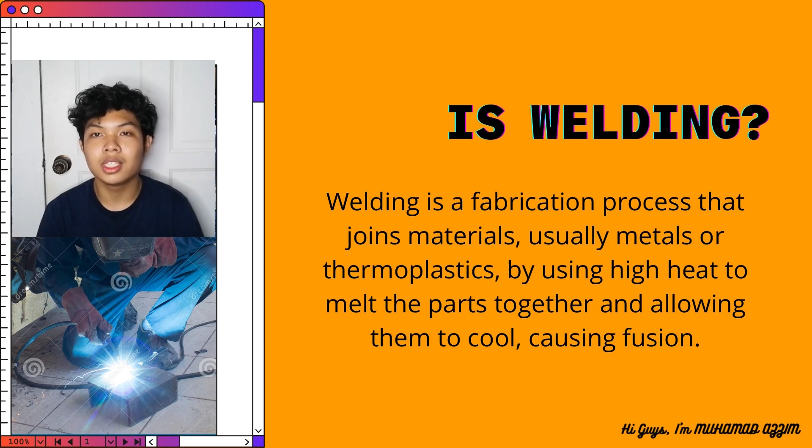Automotive applications of welding. A wide variety of automobile body components are joined together using welding techniques. The necessity for development of new welding techniques for automotive applications is ever growing to meet the new material combinations for auto body parts. The requirement for innovative welding processes is felt strongly in recent days, with automotive manufacturers focusing on lighter yet strong and fuel efficient vehicles employing lightweight alternative materials.

Autobody technicians use a variety of automotive welding techniques to complete structural repairs on various vehicles and equipment. The most commonly used welding methods for automotive applications are resistance spot welding, resistance seam welding, metal inert gas welding, tungsten inert gas welding, as well as laser beam welding, friction welding, and plasma arc welding.

Examples of automotive welding. There are many ways to use welding on cars to repair collision damage or damage due to age of the car. Here are some welding applications for vehicles. The first one is vehicle frame or fender welding. Vehicle frames and fenders become bent or damaged in collisions.

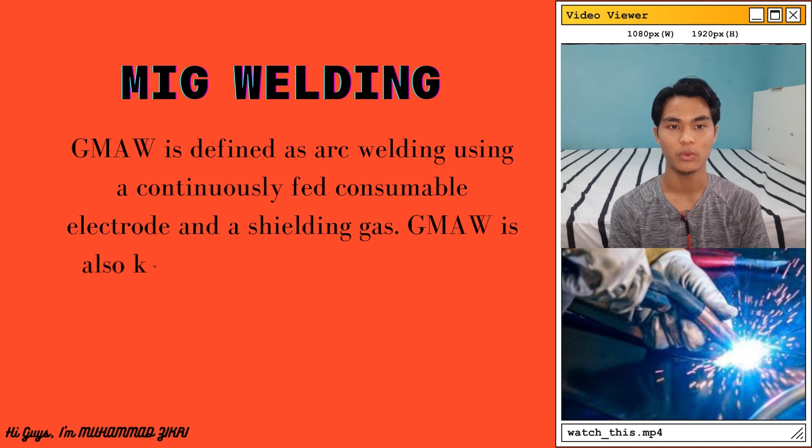09DKM20F2004. The topic that I would like to share with all of you is the type of welding used in cars. Carbon steel welding is mostly done through MIG welding. GMAW is defined as arc welding using a continuously fed consumable electrode and a shielding gas. GMAW is also known as MIG, which is metal inert gas. It produces high quality welds. It also yields high productivity.

MIG welding was originally invented in the 19th century when Humphry Davy discovered the electric arc. Originally, carbon electrodes were used but later substituted by metal ones. The first innovation came in 1920 when a bare electrode wire and direct current were used with an arc voltage to regulate the feed rate.

Today, MIG welding is seen as one of the most popular welding processes, especially in the sheet metal industry. Consequently, it is an important factor for the automotive industry as well. A lot of people are still fixing automobile parts on their own in their garage with MIG welders. The greatest advantage of MIG welding in the automobile industry is that it is capable of producing clean welds. Not only that, but it's great for precise work. There is minimal spatter and you can work with dissimilar metals easily.

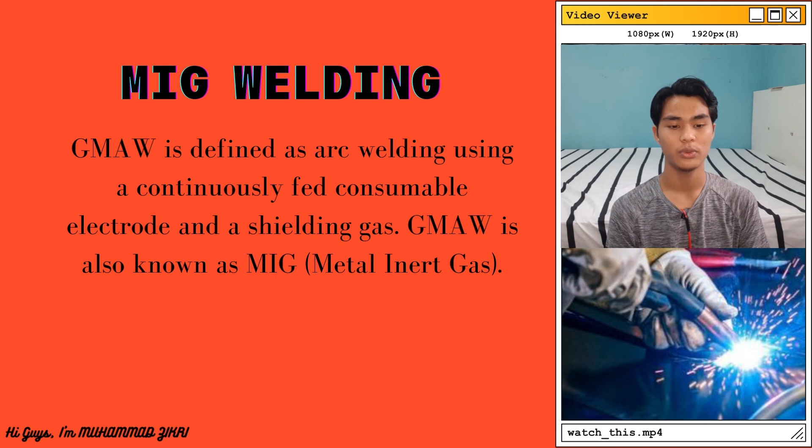It can handle a wider range of thickness than TIG or stick. MIG can handle the materials used in auto bodies without sacrificing strength or clean appearance. The newer MIG welding machines also have tons of options that make it easy to avoid distortions. It is also one of the easier processes to learn. For seasoned veterans and new welders alike, it's the best choice for auto repairs. MIG welders are by far the go-to welders for beginners because of the

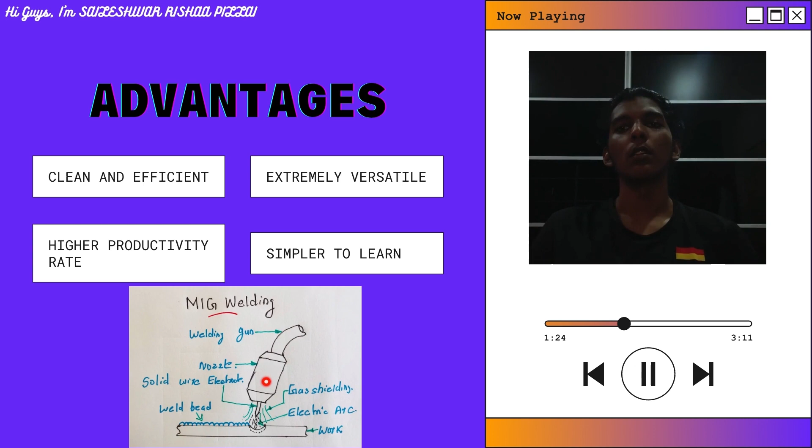Secondly, MIG welding is the simplest to learn. Welders can learn or educate others how to MIG weld in a few hours, and some instructors claim they can provide basic training in 20 minutes, with the majority of time being spent on cleaning the weld. In comparison, TIG welding takes a long time to learn, and most welders working on home projects wouldn't want to invest time into it. One of the instructors described MIG welding as a point and shoot process.

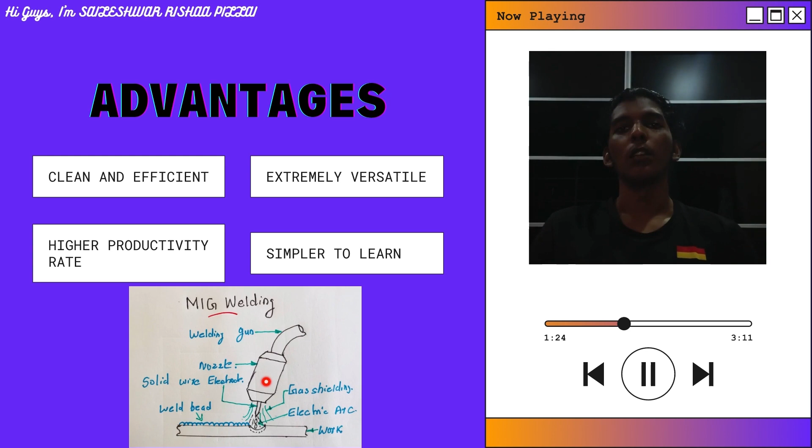Thirdly, MIG welding is clean and efficient. Since MIG uses a shielding gas to protect the arc, there is very little loss of alloying elements as the metal transfers across the arc. There is no slag to remove, which is typical for stick welding, and only minor weld spatter is produced. After a brief cleanup, MIG welders will be back on the job in a fraction of the time thanks to the minimal cleanup it requires.

Furthermore, MIG welding is extremely versatile and can weld a wide variety of metals and alloys, while operating in a variety of ways such as semi and fully automatic. While MIG welding is useful for many home welding projects, it is also used in a large number of industries. MIG is used for metals such as aluminium, copper, stainless steel, mild steel, magnesium, nickel and many other alloys, as well as iron and most of its alloys.

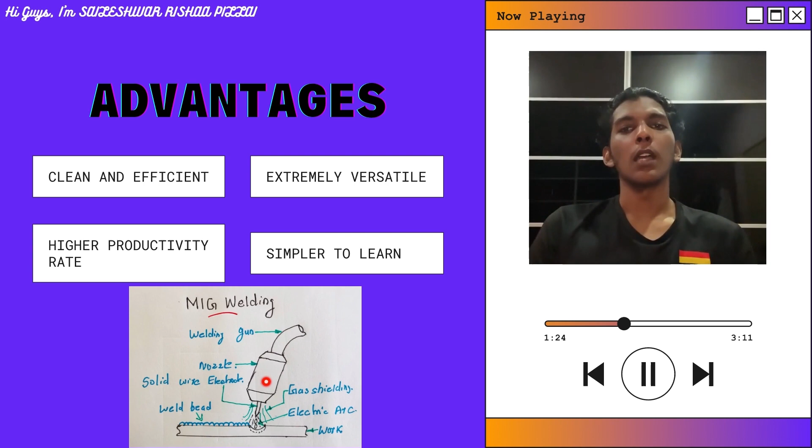And of course, every product does have its disadvantages. The first disadvantage is the cost itself. Welders will notice right away that MIG welding equipment is more complex and costly, while also sacrificing portability. In addition, shielding gas, electrodes, and replacement tips and nozzles for MIG welding can add up.

Next, MIG welding has limited positions. The fluidity of the welding puddle and the high heat input of a MIG welder rules out vertical or overhead welding, while some welders would never even think of welding in one of these positions. Take this fact into consideration when deciding whether or not to purchase a MIG welder, to make sure it can accomplish all jobs planned for it.

Moreover, this welding isn't suitable for outdoor welding. Besides not being portable, MIG welders are also unsuitable for working outside since they use shielding gas to protect the purity of the weld. Wind will play havoc with the shielding gas and impact the quality of the weld. A MIG welder also can't be hauled out into a field to repair a tractor, but works great in a garage for automotive work.

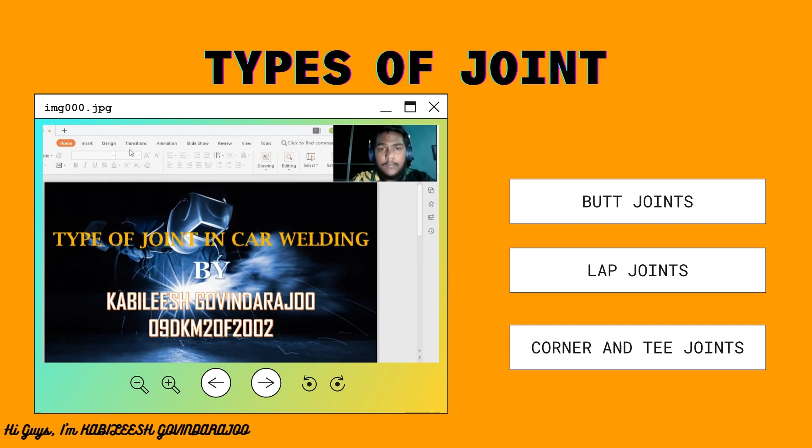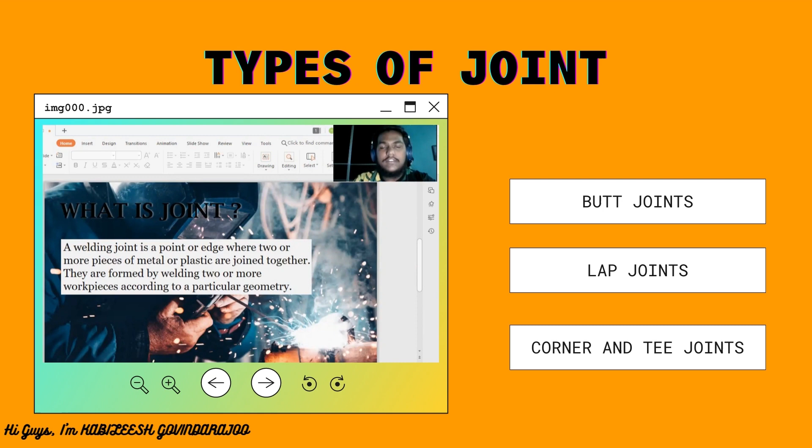Today, I'm going to talk about types of joint in car welding. First of all, what is a joint? A welding joint is a point or edge where two or more pieces of metal or plastic are joined together. They are formed by welding two or more pieces according to a particular geometry. There are many types of joints, for example, butt joint, T-joint, corner joint, edge joint, and lap joint.

Now I'm going to talk about welding joints in a car. There are kinds of welding joints that are commonly used in car welding work. Each joint piece can serve a number of different purposes based on their shape and where on a car they are to be placed. The three types of weld joints are listed as follows. First one is butt joint. A butt joint is a type of joint between two edges of different metal pieces that are lying in the same direction. The joint of this type may be either square or groove.

Second one is corner and T-joint. The corner joint is a joint between two edges of metal pieces that meet at a perpendicular 90-degree angle. A T-joint is a joint between two pieces of metal where one piece's edge is perpendicular to the surface of the other. The corner joint forms an L shape and the T-joint has the shape of the letter T. Both joints are commonly used in many types of metal structures, especially in car welding.

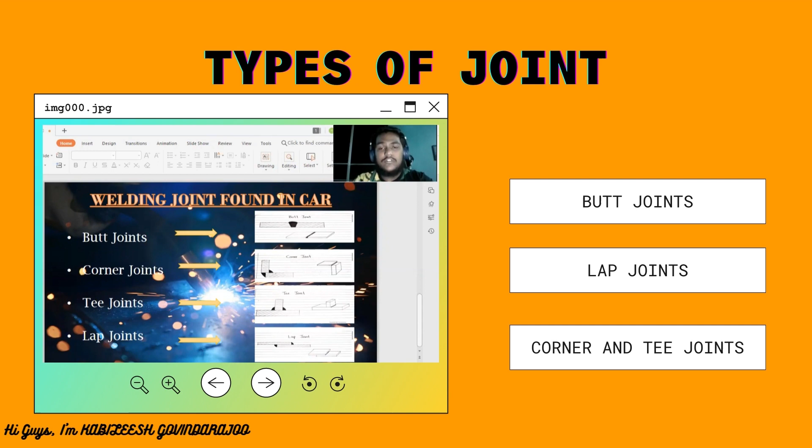The final one is lap joint. A lap joint is a joint between two pieces that are overlapping one another. It is one of the strongest types of joints available. However, for maximum joint efficiency, the overlap should be a minimum of 3 times the thickness of the thinnest member of the joint. Lap joint is used with torch brazing and spot welding applications.

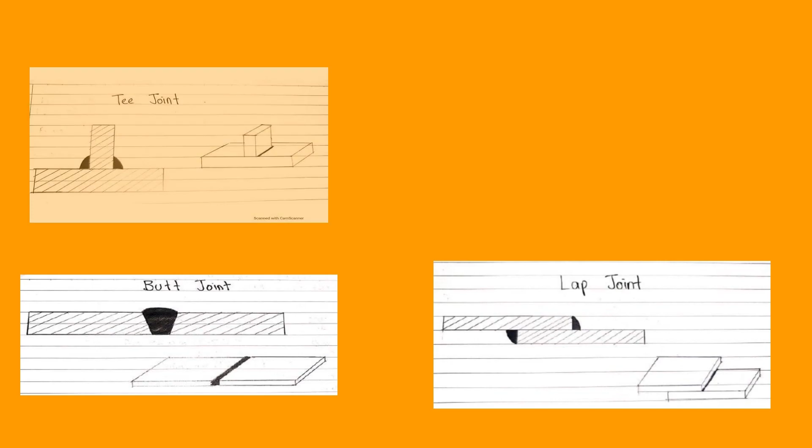I'm going to talk about the safety elements during welding a car. Welding is a dangerous job that can do heavy damage to our life. That's why welding is a high-salary job. Tools are most important in welding. The welder should use the correct equipment to make sure the product is good and to ensure their safety.

First of all, welding helmet with side shield. A welding helmet will protect welders from UV radiation from the oxyacetylene flame. Rather than welding helmets, welders can use welding goggles to protect their eyes from the UV radiation too. Welders also must use a welding apron. It can protect them from hot slag.

Welding is a very hot process of work. A lot of heat is needed and the place can easily catch on fire. So the welders should use gloves, fireproof clothing and boots to ensure their skin is protected from burns and to be able to rescue them easily if any accident occurs. Welders are advised to use respirators during the welding process because fumes and oxides are produced and they can damage their health.

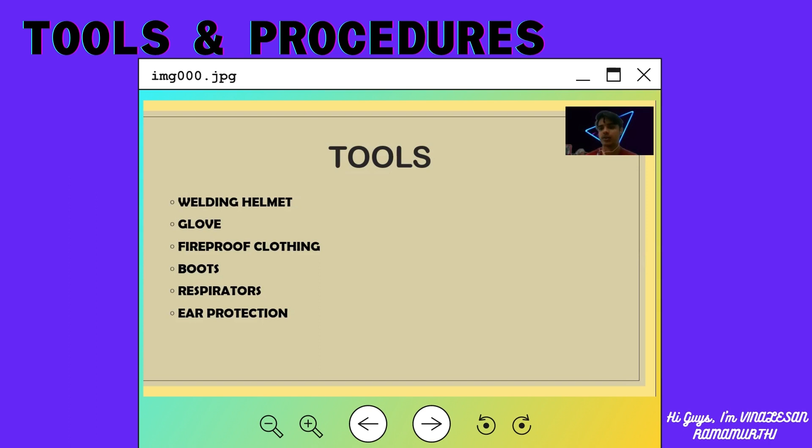Ear protection is compulsory because a lot of noise is produced in the workplace. It's better to use fire-resistant ear protection. It can protect from the risk of sparks or spatter entering the ears of the welders. So second is the procedure to do welding. Welding is not an easy process. It has its own procedure. Usually welders are well trained and follow the procedure.

There are two types of welding used for cars. The most commonly used are MIG, which is metal inert gas, and oxyacetylene welding. The procedure of MIG is, first, an arc is struck between the end of a wire electrode and the workpiece, melting both of them to form a weld pool. The wire serves as both heat source and filler metal for the welding joint.

The wire is fed through a copper contact tube which conducts welding current into the wire. The weld pool is protected from the surrounding atmosphere by shielding gas fed through a nozzle surrounding the wire. Shielding gas selection depends on the material being welded and the application. The wire is fed from the rear by a motor drive and the welder moves the welding torch along the joint line.